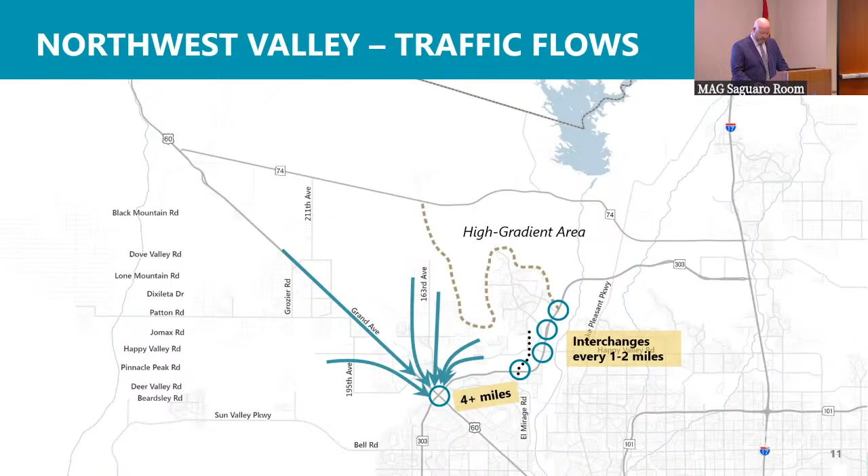As you can see on this map, there are interchanges spaced every 1 to 2 miles along this corridor, but there's a large gap - you see that 4-mile section right there. Residents can travel east and go out of their way about 5 miles, so the majority of folks enter Grand Avenue and go through the Loop 303 interchange.

Let's take a look at some of the travel times in this area, some issues residents are dealing with. The majority of the growth is occurring along 163rd Avenue, you see up there. It takes residents almost 10 minutes to get through that light in the morning, during the AM peak hour. 10 minutes - a long time.

Once they get on Grand Avenue, they have an additional 2.6 minutes to go before they get to Loop 303 - over 12 minutes. I've talked to a lot of residents about their kids who get bused out of that area to different schools. Their kids are late every single day by 20 to 30 minutes because they get stuck in traffic.

This is an illustration I wanted to show the audience. This is westbound Grand Avenue, looking up towards Wickenburg - you can see traffic backed up from 163rd Avenue on Grand Avenue. You can also see traffic backed up on 163rd Avenue trying to get on US 60 Grand Avenue.

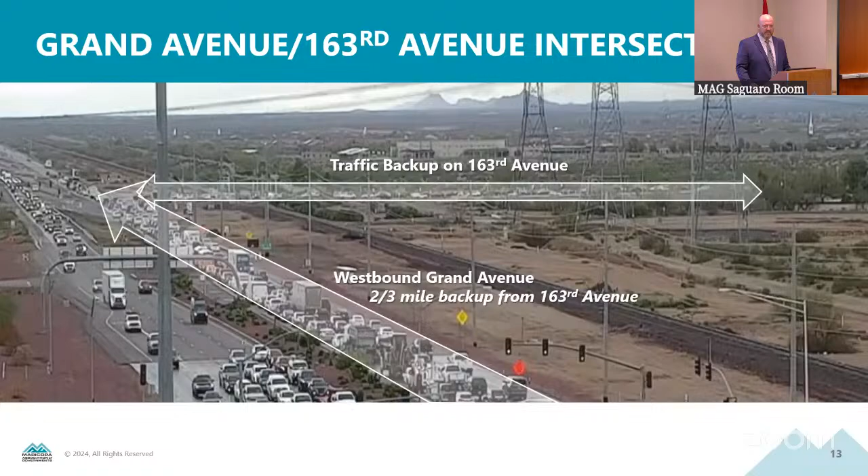Residents trying to make that left onto Grand is a predominant movement. There's about 30,000 vehicles a day that use 163rd Avenue and about 60,000 that use Grand Avenue. This is another viewpoint of Grand Avenue from 163rd Avenue. This photo was taken by a drone, and you can see it was not during the peak hour in the morning, but you can still see traffic backing up.

One of the issues along this corridor is the BNSF rail line, which you can see on the left side of the screen. With all that traffic coming in the AM peak hour, you also have a train running through there a few times a day. Traffic backs up significantly - you can see all those cars backed up in that right turn lane. It spills over into the through traffic, which creates a bottleneck, and it continues to back up all the way to the 303 interchange.

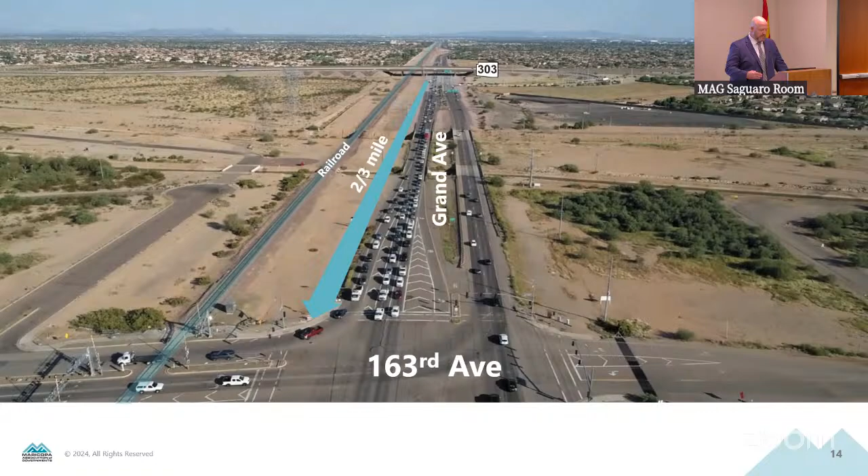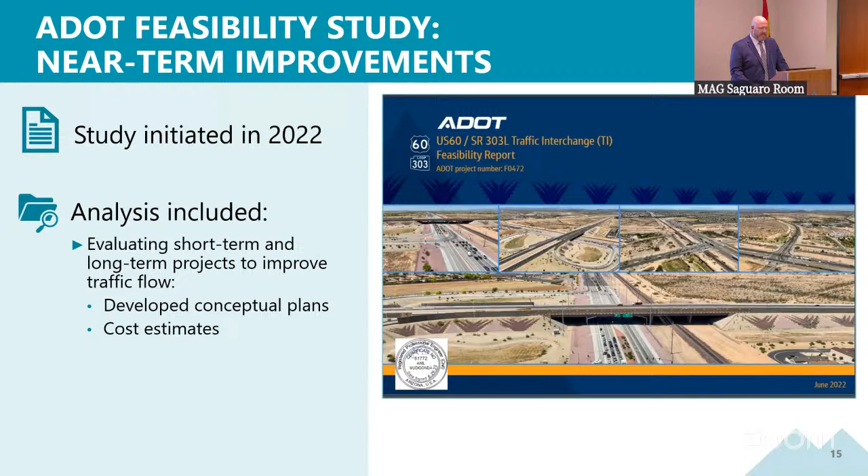This issue is nothing new to the region. ADOT received a state appropriation back in 2022 to do a feasibility study to identify some near-term improvements for this area. They did a great job analyzing some quick improvements to help provide relief to the residents in that area.

The slide on the left shows improvements that have been completed and are currently under construction at 163rd Avenue. The lines highlighted in blue were completed last December. The ones in yellow are currently under construction today. We talked about that heavy left turn movement - well, ADOT's constructing a third. We're going to have triple lefts at 163rd Avenue.

They're also putting an additional through lane in the eastbound direction, and adding more capacity to that right turn lane off of Grand Avenue on 163rd Avenue, to help cut back on traffic spilling into the main through lanes. On the right side of your screen, currently under construction today, ADOT is adding a triple left at the northbound off-ramp on Grand Avenue and an additional right turn lane.

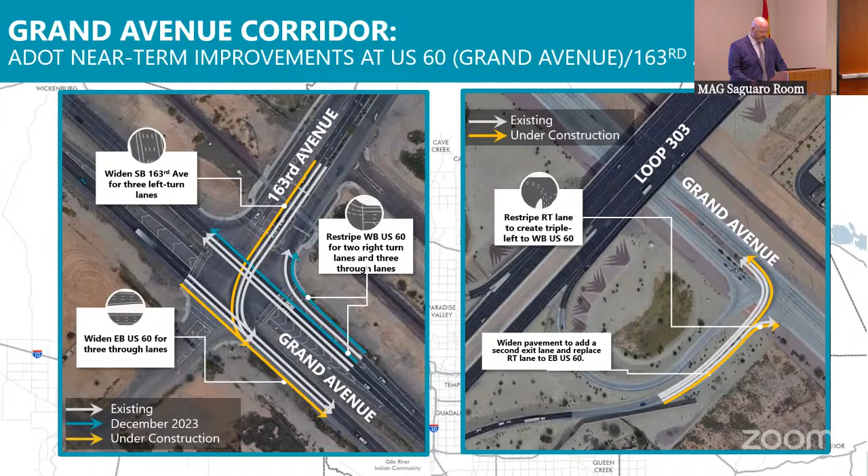So while these studies were going on, we've been talking with the City of Surprise, Peoria, ADOT, McDOT, and a few other stakeholders about the transportation needs in this area. A study was kicked off earlier this year by MAG in cooperation with our member agencies to take a look at Grand Avenue. We knew that more needed to be done besides the near-term improvements being completed by ADOT.

Right now we're doing a corridor study on Grand Avenue from Loop 303 to State Route 74. In addition to looking at different types of improvements on Grand Avenue, we're also looking at the surrounding arterial system, looking at the circulation, where residents come and go, where businesses are going to be located in the future, and how they get access to Loop 303 besides going down Grand Avenue. This study kicked off early this year, and we anticipate wrapping it up late next fall.

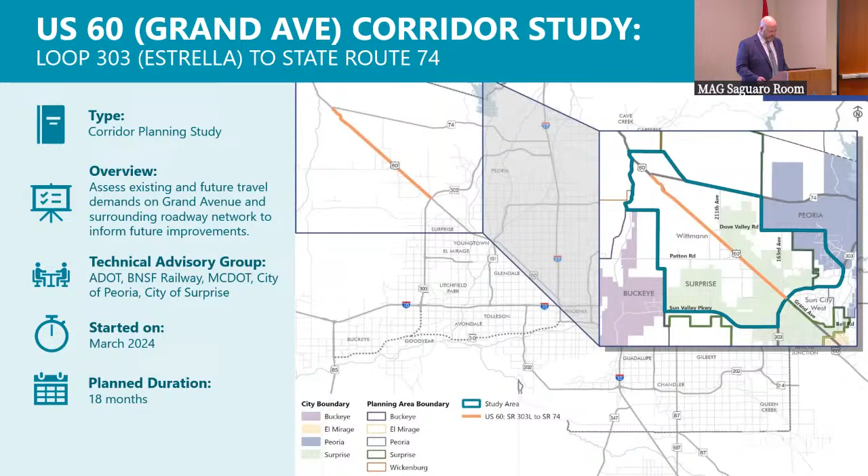As part of that study, we actually held our first kickoff meeting in August of this year. We held this meeting on 163rd Avenue at Asante Prep, where all the traffic impacts are occurring, where the majority of the growth is occurring in this corridor. We wanted to talk to those residents to see what's happening on the ground. So we met with them.

We had about 175 to 200 people in attendance. It was very well attended, and we really wanted to sit down. We wanted to let the residents know, hey, we've heard what's going on in this area. They've been very vocal. We gave them an update on the ADOT improvements in the area, and on what the study looks like and what the process is. But we truly wanted to understand what would they experience on a daily basis. They're stuck in this traffic 15 minutes in the morning to go two-thirds of a mile. They know better than anybody what's happening on the ground.

But we also wanted to understand, what would they propose in this area? What improvements do they see that would help benefit the commuters in this corridor? So we collected a ton of comments. And I want to take a moment to thank staff from City of Surprise, Peoria, McDOT, and ADOT. We had almost 200 people at this meeting, and we had about 22 staff members, including Councilmember Haney, attend to help talk to the residents. We would not be successful if it wasn't for their participation. So thank you for that.

So at the end of that meeting, we pulled our consultant team together. We looked at all the comments we received from the residents. We asked our consultant team to take a look at these, see if they're valid, but also look into the analysis and see what else can we do to help provide relief to these residents. Now I'm going to walk through 5 different recommendations that we're proposing for funding today.

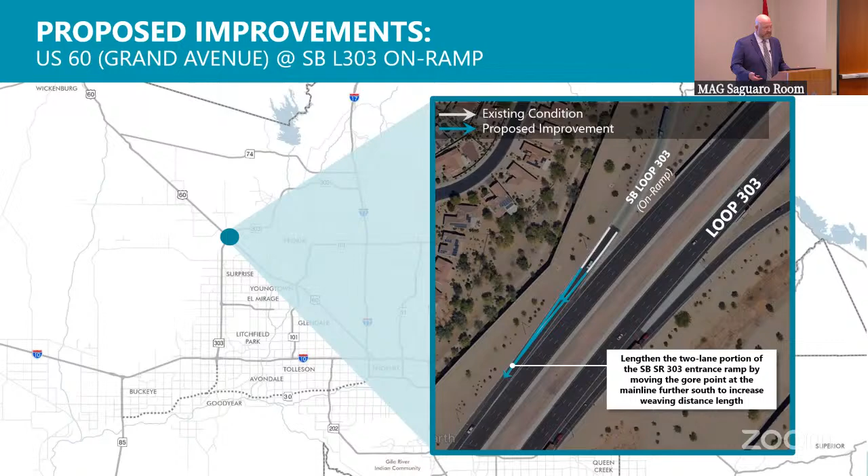In addition to that same on-ramp, we're going to extend the Gore Point. Right now you have that single lane that turns onto the on-ramp. It goes from 3 lanes to 2 lanes to 1 lane really quickly, allowing residents to merge safely on the 303. We're going to extend the 2-lane section about 200 to 300 feet to give the additional vehicles that are now going to be entering that ramp, because of that second right turn lane, more time to merge in and get safely on the 303.

The next one is at an unsignalized intersection west of 163rd Avenue. This T intersection serves a frontage road between Deer Valley and 163rd Avenue. Right now you have cars going 55 miles an hour down Grand Avenue, and you have cars wanting to get off at this location, or they're getting on, which creates a safety issue. A lot of residents commented on safety issues, a lot of accidents occurring in this area, and they were right. So what we're proposing to do is add a decel and acceleration lane at this location so residents can get on and off safely in this section of roadway.

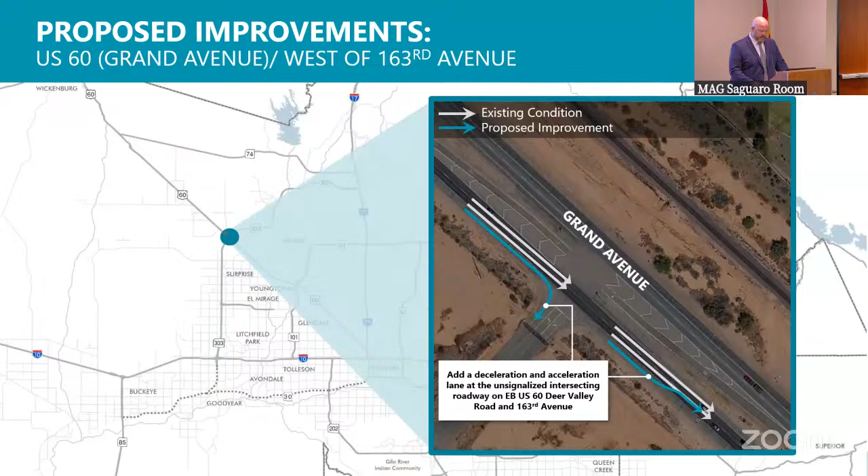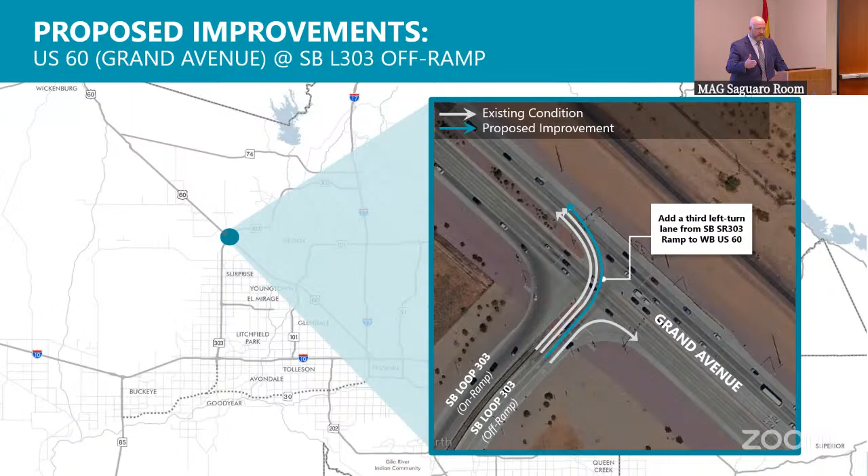The next improvement is adding a 3rd left turn lane on the southbound Loop 303 off-ramp. Right now there's 2 lanes. The great thing about this is we have 3 receiving lanes on the other end. This allows vehicles getting off the freeway to safely line up to get off on 163rd Avenue, so we can start stacking cars up and get them in the right turning movements.

The final improvement we're proposing is adding a 4th through lane, westbound and eastbound, at 163rd Avenue to add more capacity to this intersection and help improve operations. If this project is approved today and goes to regional council approval, we'll work with our engineering team during the design phase to address how these 4 lanes will narrow down to 2 lanes later down the facility.

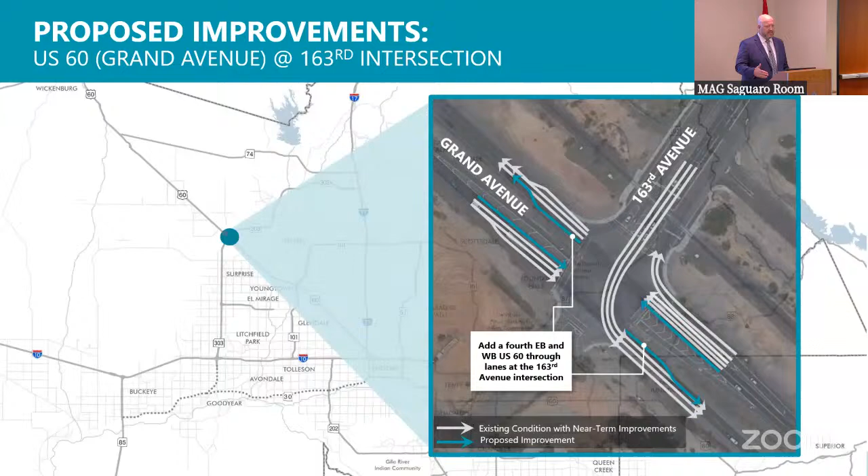Let's go through the AM peak hour delay by approach. The graphic on the left shows the numbers I showed earlier today, where it takes 9.8 minutes for people in the southbound direction to get through that intersection. The middle slide is still the 2023 baseline condition after the ADOT improvements are completed. You can see we go from 9.8 minutes with no improvements down to 2 minutes. That's fantastic, good use of money. Other improvements have also reduced the cycle times.

But on the far right graphic, you'll see 2030 after the ADOT improvements are completed, and the numbers start to increase. Why? Because the area is still growing at a rapid pace. There are a lot of folks still developing off 163rd Avenue, a lot of businesses coming online, and BNSF has a major intermodal facility being planned out towards Wittmann. So this area is still a fast-growing region.

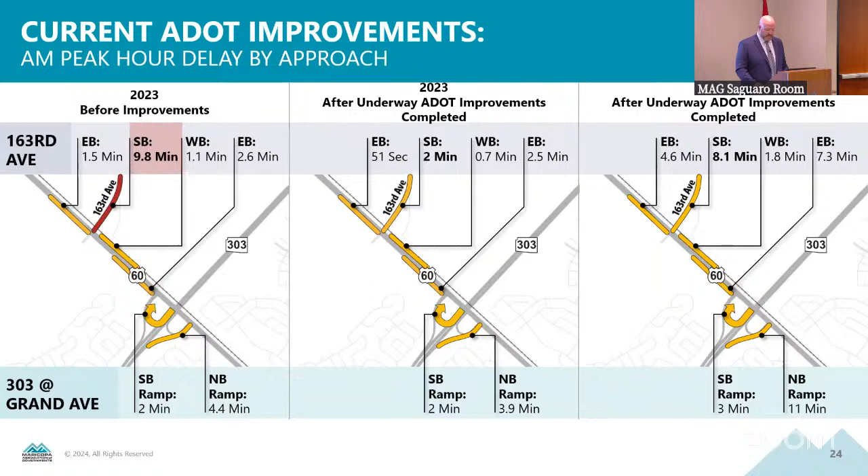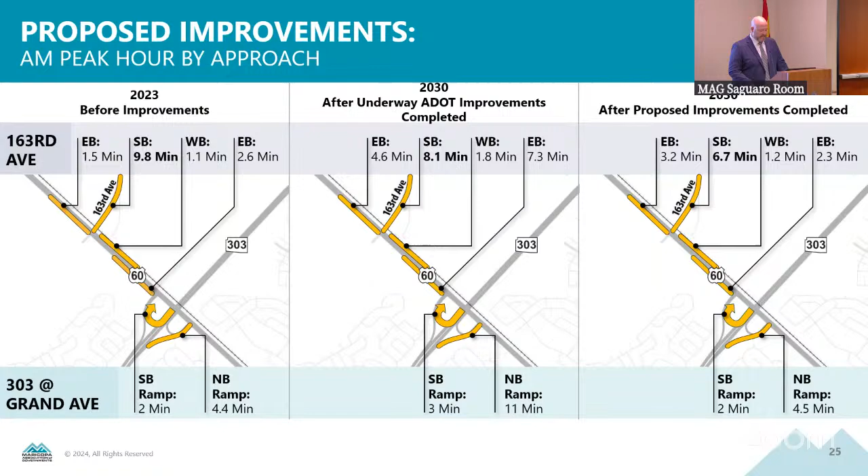In this next slide, the left side is 2023 before improvements, the middle is 2030 after ADOT improvements, and the right is 2030 after our proposed improvements are completed. You can see we start to bring those numbers back down again, especially at the southbound direction at 163rd Avenue. Looking at the eastbound movement, under 2030 ADOT it's 7.3 minutes, and it goes down to 2.3 minutes. Also the northbound ramps go from 11 minutes down to 4.5 minutes. So we're putting a dent in the congestion in this area.

It's great that ADOT is making these improvements, and we're here today to propose 5 projects to help decrease congestion in this area. But it's not the ultimate fix. This is meant to relieve congestion in the short term until we can get Prop 479 projects in place. We have a lot of plans in this area, especially the US 60 Loop 303 Ultimate System Interchange in the future, improvements to US 60 at 163rd Avenue, and looking at a grade separation there. We're also currently studying another access point for residents who want to get on the Loop 303 — that big circle shown there is the Loop 303 traffic interchange between US 60 and El Mirage. So we have a lot of plans in place, and these proposed projects will hopefully help get us to that point.

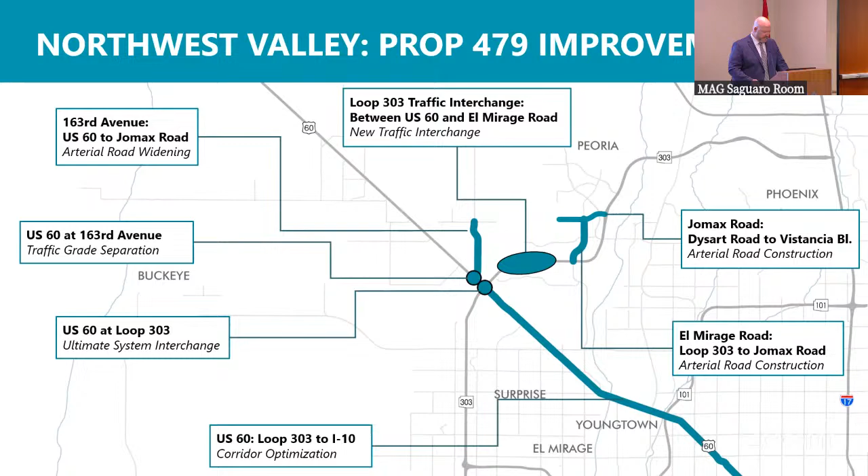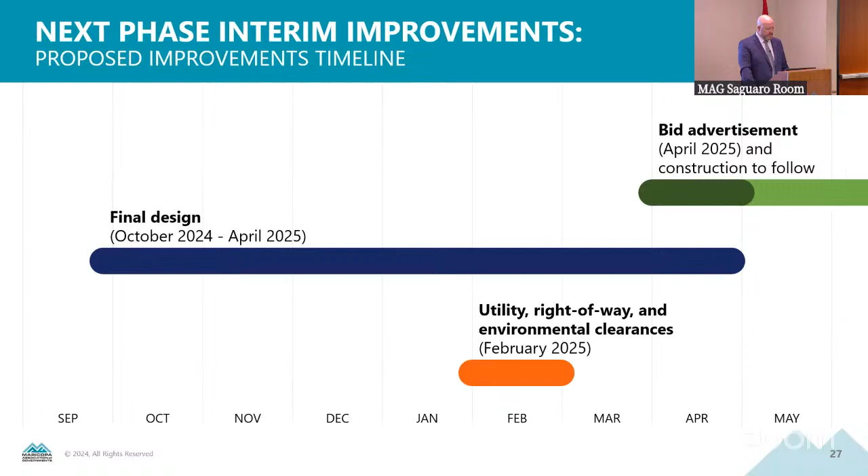If these proposed projects are approved today and by Regional Council, the ADOT design team will be able to get started immediately at the end of October, and they anticipate going to construction next spring, early summer of next year. Madam Chair, that completes my presentation. I'm happy to answer any questions.

Madam Chair, if I could add a couple more points. First, the funding source being requested is the minor improvements allocation as part of the freeway program. There was a robust discussion here at TPC last spring about the value of that funding source and positioning the region to react and respond. One outcome was to increase the annual allocation from 5 million to 10 million, enabling us to be more responsive and put improvements like this forward. Second, there would be no way to move this quickly or be this responsive absent the dedicated half-cent sales tax. Relying just on existing revenue streams, federal funding, and the small portion of state funding available, there would be no way to relieve some of this congestion.

So I just want to emphasize the importance of the half-cent sales tax to be able to address these problems.

Excellent, thank you John. Appreciate that presentation, Tim. I'll open it up for comments and questions. Councilmember Haney, please.

Thank you, Madam Chair. Excellent presentation. I actually represent this area. Growing up in Surprise, this area was almost not even thought of becoming what it is today. It was mostly folks who moved out there to escape the growth, and then very quickly it exploded with growth. A lot of folks felt like they were being forgotten, and the infrastructure continued to be stressed with no relief in sight.

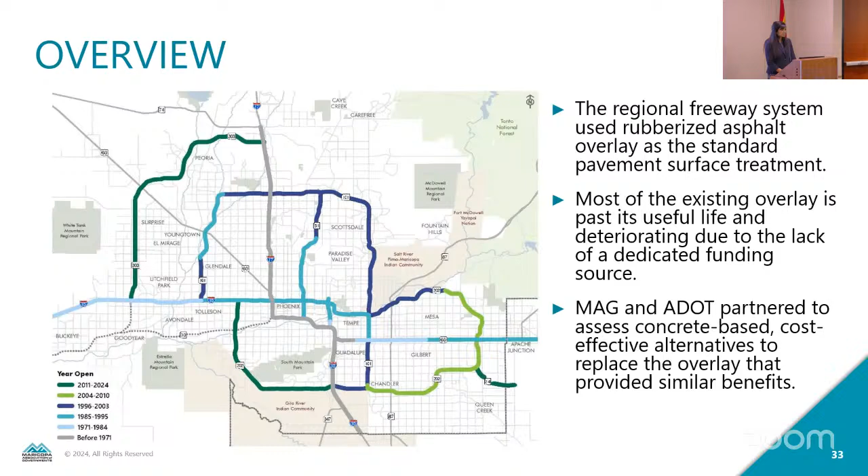This was largely due to the fact that there was no dedicated funding source set aside for its capital replacement, and the only capital replacement that occurred was as a scope element as part of our regional freeway program project improvements. As a result, MAG and ADOT looked into some cost-effective, concrete-based alternatives to that overlay that would provide similar benefits. And so that's where Diamond Grind came into the question.

So what really is the difference with Diamond Grind in comparison to that rubberized asphalt overlay? I'll walk you through the typical design of our regional freeway pavements. First, you have a layer known as the subgrade, which is really that compacted soil. On top of that, you typically have another layer known as the aggregate base, which is graded stone material, or at times can be asphaltic concrete.

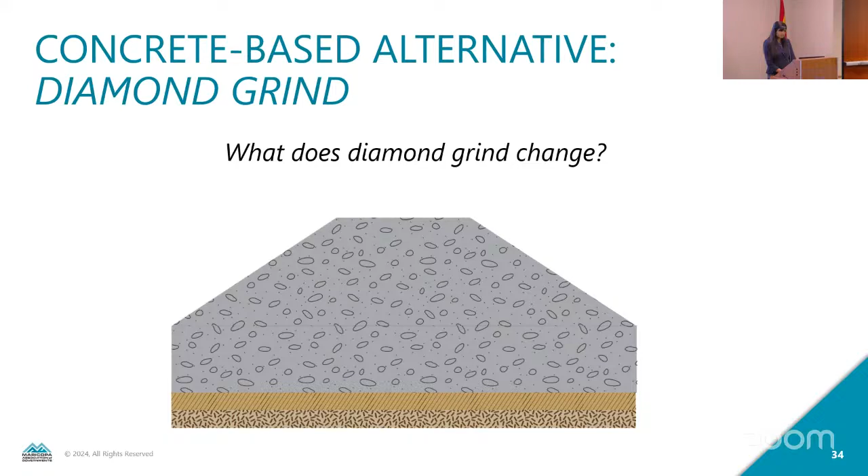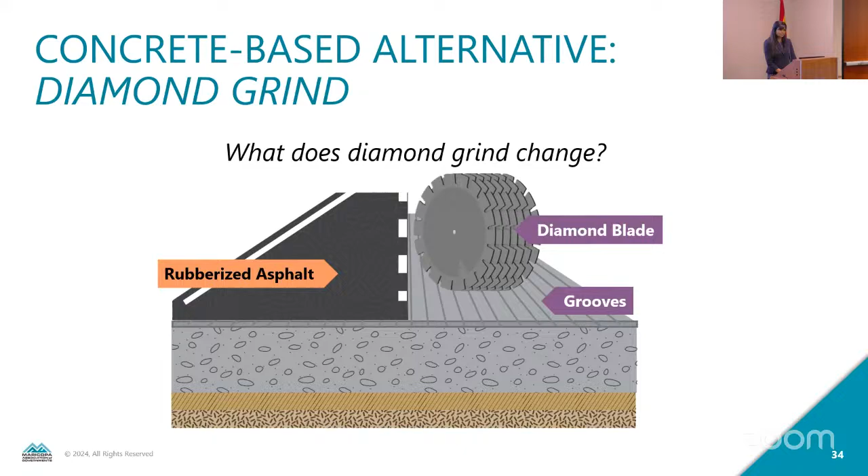Then finally, on top of that, you've got a thick layer of Portland cement concrete pavement, and that rubberized asphalt overlay would be overlaid at the top. Now with Diamond Grind, instead of having that top thin layer of overlay, what you have is diamond blades that directly implement grooves, thin grooves, into that concrete surface.

MAG and ADOT came back and recommended assessing Diamond Grind as an alternative to the MAG Regional Council, and that was approved as a pilot program back in June of 2020. The scope of that pilot included assessing Diamond Grind by implementing it on 3 pilot projects that were part of the Regional Freeway program. The performance of that treatment would be assessed based on 3 approved evaluation criteria shown here on the slide: ride quality, life cycle costs, and public acceptance of that concrete-based alternative.

The 3 pilot projects, in order of implementation, are also shown here on the map. They include the section on Loop 101 Price between Baseline Road and Loop 202 Santan, and the section on Loop 101 Pima between I-17 and Pima Road. Those 2 segments have now been completed. And finally, there is a 3rd pilot project currently under construction on Loop 101 Agua Fria, between 75th Avenue and I-17.

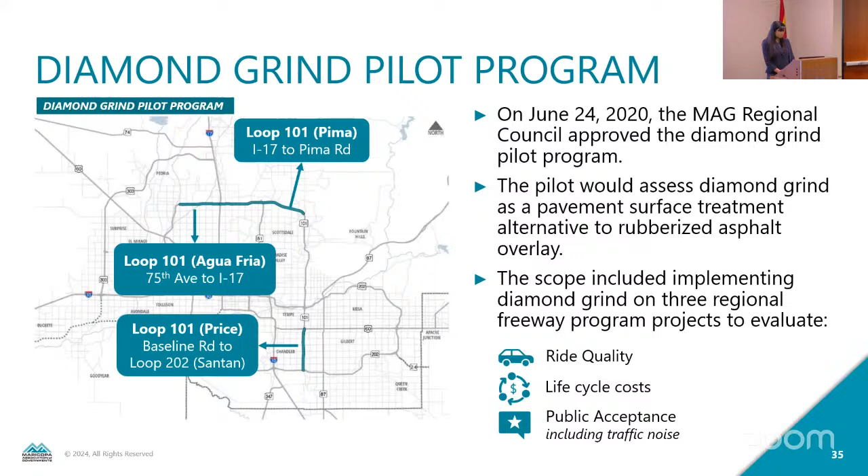So throughout the duration of the pilot program, in addition to those 3 criteria I mentioned, there were several other evaluation efforts completed. Ride quality, as I mentioned, looks into the smoothness of the road and the friction between the tire and that pavement surface, which is important from a safety perspective, particularly during our monsoon seasons.

Then when we looked at life cycle costs, what we looked at was the cost of capital replacements and maintenance practices required for both of those surface treatments over their estimated useful life.

We also tracked and incorporated the public feedback received as these different segments of Diamond Grind came online. Part of that included looking at traffic noise impact—different sound levels, the pitch of those sound levels, and how that noise changed over a set duration resulting from implementing these pavement surface treatments. We also looked into the disruption to the roadway user, meaning lane closures required for the different maintenance practices needed to maintain that road in good quality.

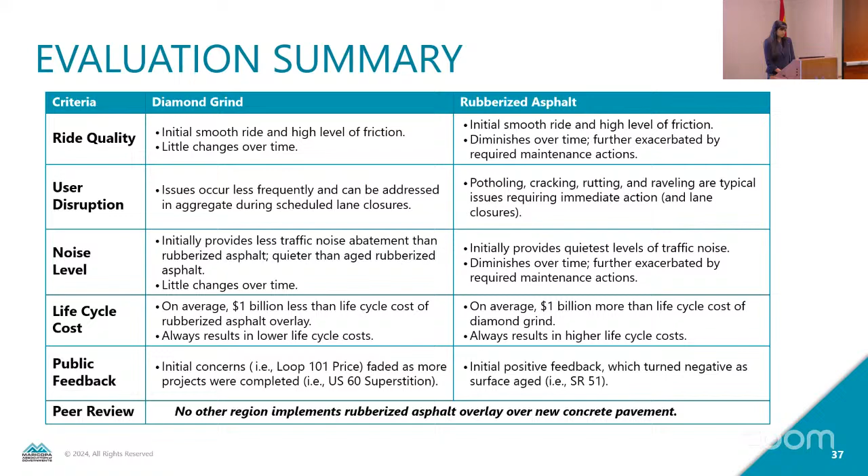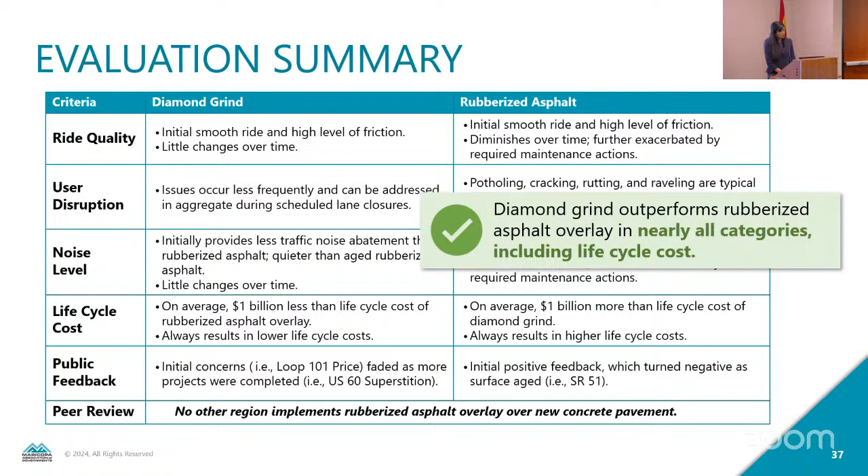When we conducted the peer review, what we found was there is no other region in the nation that does what we do in terms of our regional freeway pavement design. So the bottom line is that Diamond Grind outperforms rubberized asphalt in nearly all categories, including in terms of life cycle cost.

Back in October of 2023, we came back and provided an overview of all these different findings to Transportation Policy Committee. Because of the support received there, we took it forward to Regional Council in November of 2023, requesting to expand the pilot program, and that approval was received. As part of that approval, there were 4 main components.

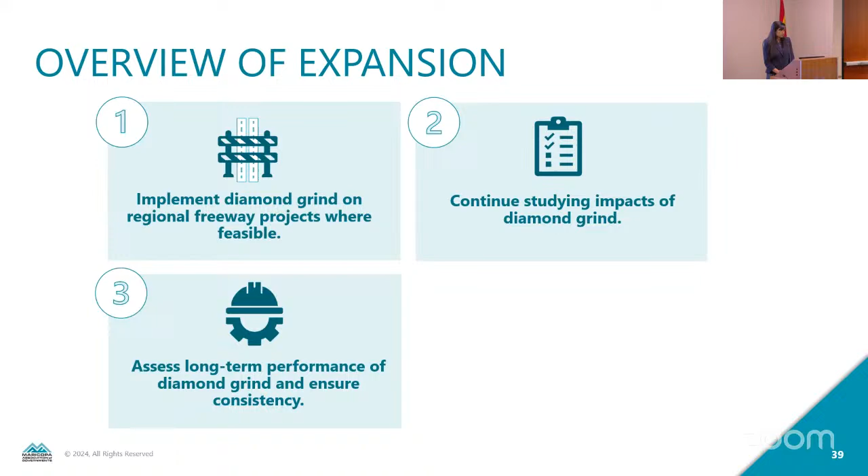The first component was that we would, moving forward, implement Diamond Grind on all regional freeway program projects where feasible. We would also continue studying impacts to Diamond Grind, including a couple of specific study efforts underway. We would also initiate efforts to continue monitoring the long-term performance of Diamond Grind as it aged in our region, and ensure that every application of Diamond Grind throughout the region was performing consistently. Finally, we said we would come back and provide quarterly updates to policy committees.

And so that brings us to where we're at today. This quarterly update is now the 3rd installment of these updates since that expansion was approved, and it covers the period of July to September 2024.

Here are all the different efforts that were underway during that period, including a couple of efforts that are implementing Diamond Grind on different segments of the freeway network. In addition, there are 2 active study efforts underway, and a couple of long-term performance assessments, including a regrind work on that Loop 101 Price corridor. But before I get to that, I'll quickly touch on each of these elements and then end with the Loop 101 Price regrind overview.

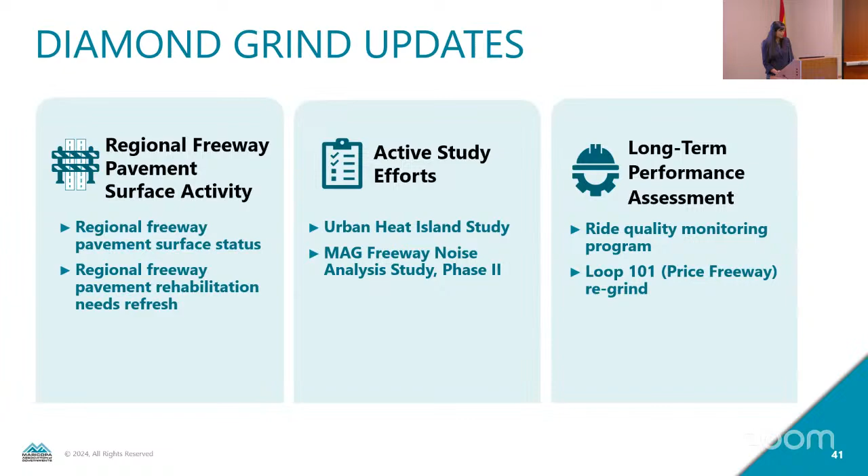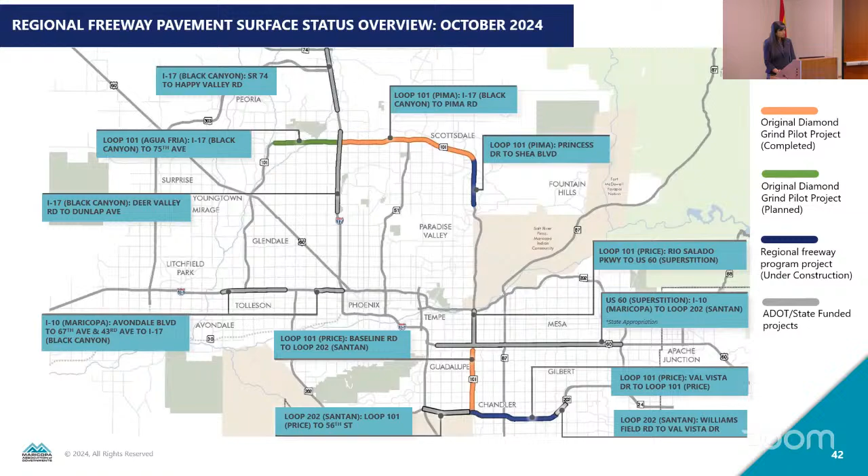So first, on this map, what you're seeing are all the different Diamond Grind projects, whether part of that original pilot program, being constructed as part of a regional freeway program project, or funded either through ADOT or the state legislature. A similar map was provided as part of the last update in August, and largely these projects remain the same. One new addition is an ADOT-funded maintenance project on Loop 202 Santan between Val Vista and Williams Field Road.

Another effort currently underway is looking to update the freeway pavement conditions as of the current time frame. Previously, there was no dedicated funding source available for capital replacement of pavement surfaces. As discussed earlier regarding the importance of passage of Proposition 479, the Regional Strategic Transportation Infrastructure Investment Plan, partially funded through Prop 479, includes an allocation set aside to directly address these needs.

As part of this refresh, we're looking to update the latest conditions so that can help inform how this set-aside funding should be allocated based on where the priority needs are. Previously, MAG and ADOT had completed this effort to show conditions in 2020, and it just needs updates to reflect some of that ongoing or completed work shown on the map before.

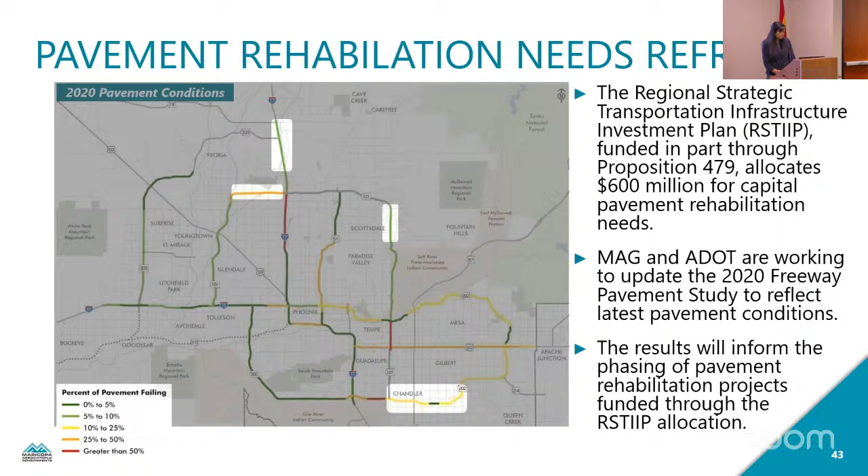As a further example, the segment currently under construction on Loop 202 Santan, between Val Vista and 101, before construction was categorized in poor condition. After construction, it will no longer be in poor condition, so that will be one of the updates made here.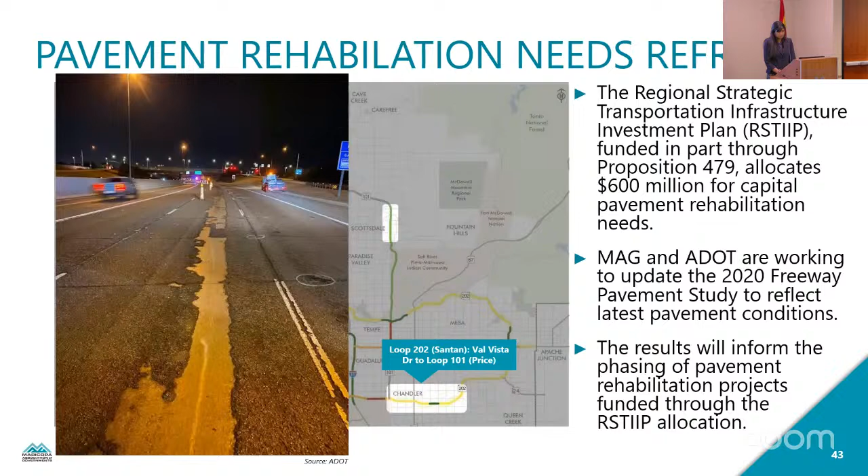Moving on now to our two active study efforts. The first one currently underway is a study looking at the impact of diamond grind on the regional urban heat island effect, especially in comparison to the impacts of rubberized asphalt overlay. This is being conducted in partnership with ADOT and led by a team at Arizona State University. As of September, the project team had just completed their 3-month continuous data collection, and efforts are currently underway to complete the analysis of that data.

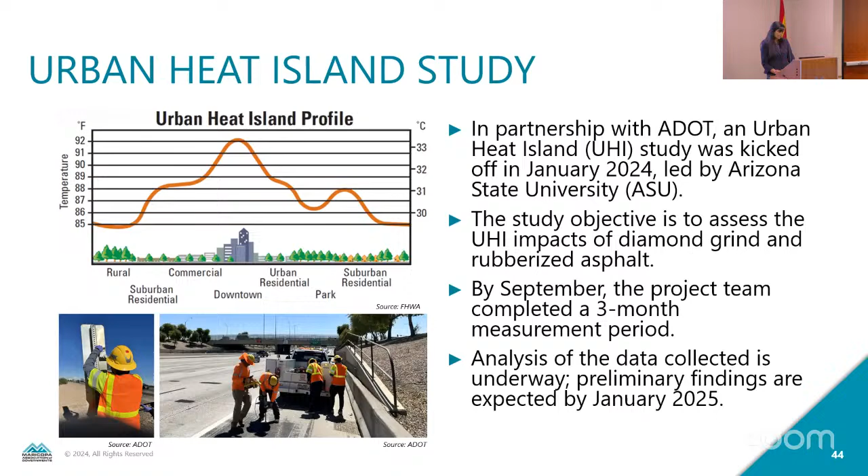The second active study effort is the Freeway Noise Analysis Study Phase 2. As shown prior, there is one last original pilot project yet to be completed. This project allowed a unique opportunity to collect noise data before and after the construction of diamond grind. The first phase was actually completed during the program's pilot phase back in 2021, focusing on the other two completed diamond grind pilot projects.

With this effort, we're focusing on the third pilot, Loop 101 Agua Fria. Not only are we collecting data before and after construction, we're also collecting data under different temporal conditions, which is known to impact traffic noise. There's a total of 4 planned measurement phases. As of September, 2 had been completed, accounting for pre-construction data under both winter and summer conditions.

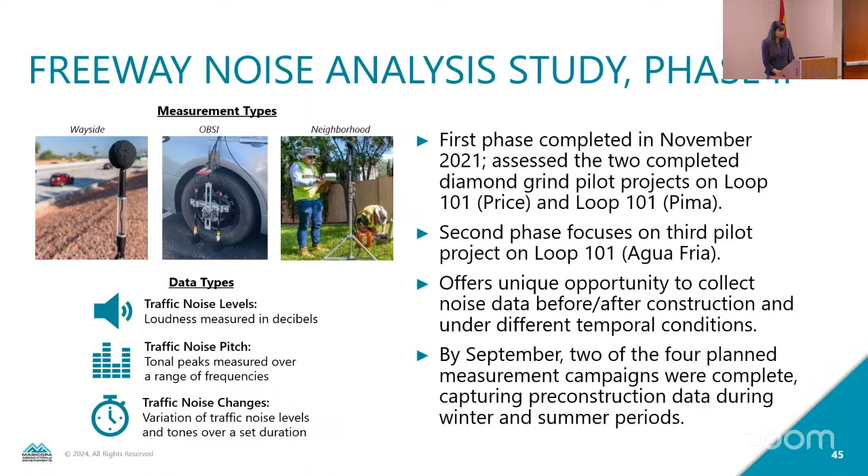Finally, a new effort being initiated by ADOT is an ongoing monitoring effort looking at ride quality on an annual basis. ADOT will go out annually collecting ride quality data using this vehicle shown on the slide, on all diamond ground surfaces completed to date. That data will go through a year-over-year analysis to reflect how diamond grind performs as it ages.

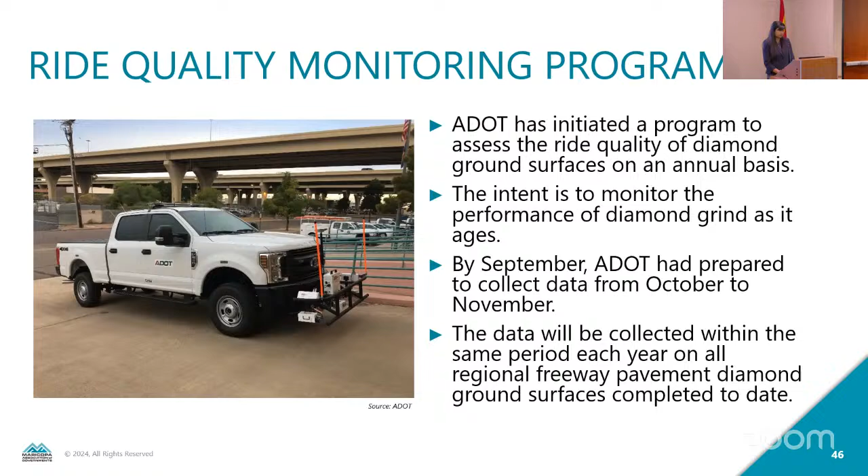As of September, they had completed all preparations to go out there between October and November, and they'll do this every year during this same time frame. I believe they're actually out there right now in the midst of this work.

This brings me to my final update for this quarter, the work just completed on the Loop 101 Price corridor. As part of assessing the performance of diamond grind, we also wanted to ensure it was performing consistently in every instance it was applied throughout the region.

One question still outstanding from our original discussion with TPC back in October 2023 was why Loop 101 Price was getting different feedback than any of the other diamond ground sections had received to date. To back up a bit, the section on Loop 101 Price between Baseline Road and Loop 202 was the very first pilot, completed in fall of 2020. Once completed, it received a significant amount of public feedback regarding traffic noise concerns, and to date it's been the only one to receive that level of feedback.

MAG and ADOT went back and looked into what might be causing this issue specific to this corridor. The only visible evidence we could point to was something known as transverse tines, which are horizontal grooves known to cause tire whining, essentially emitting a high-pitched noise. So as part of the approval to expand the pilot program and ensure consistent application, MAG and ADOT agreed to remedy this.

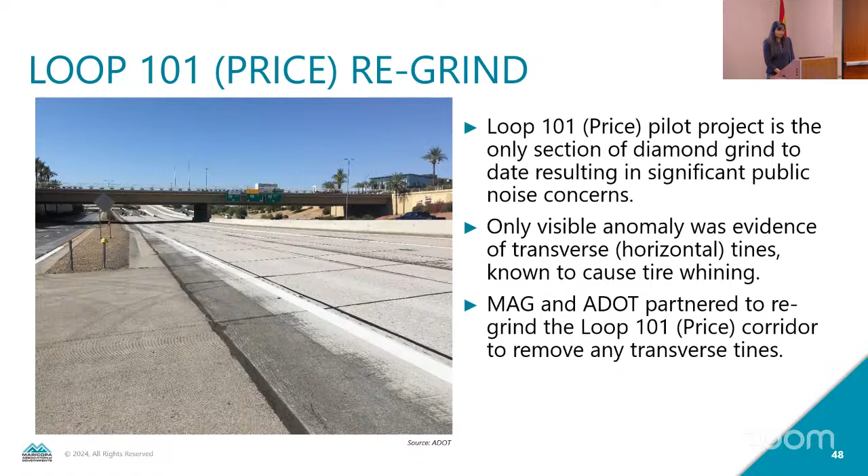Funding for that work was approved by the MAG Regional Council in February 2024. ADOT then completed the work over a 5-month period between April and August 2024. What you see here is that corridor going from a location that still has the overlay to the Diamond Grind section post the regrind work. Since that work was completed in August 2024, ADOT has not received any public feedback regarding traffic noise concerns.

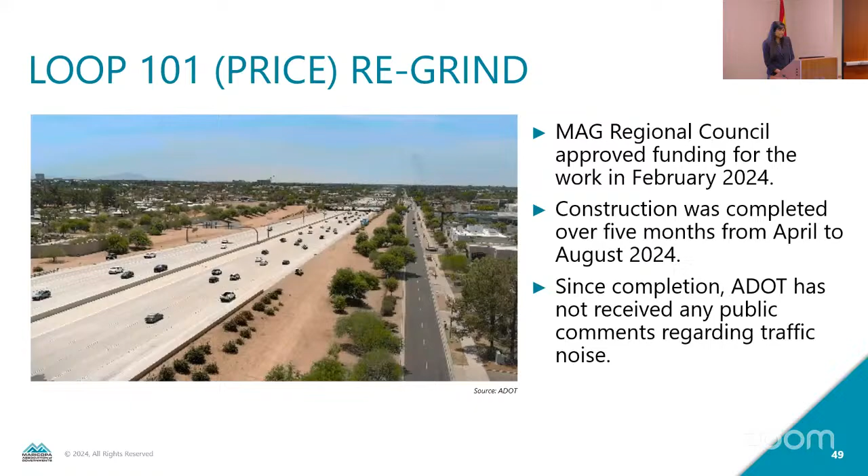I'll walk you through these results, but first some context. On the y-axis of this graph are sound levels measured in decibels, and on the x-axis is frequency, measured in hertz, representing the pitch range of the emitted sound levels. As a rule of thumb, under 1,000 hertz is considered the low pitch range, and sound levels emitted above 1,000 hertz are within the high pitch range.

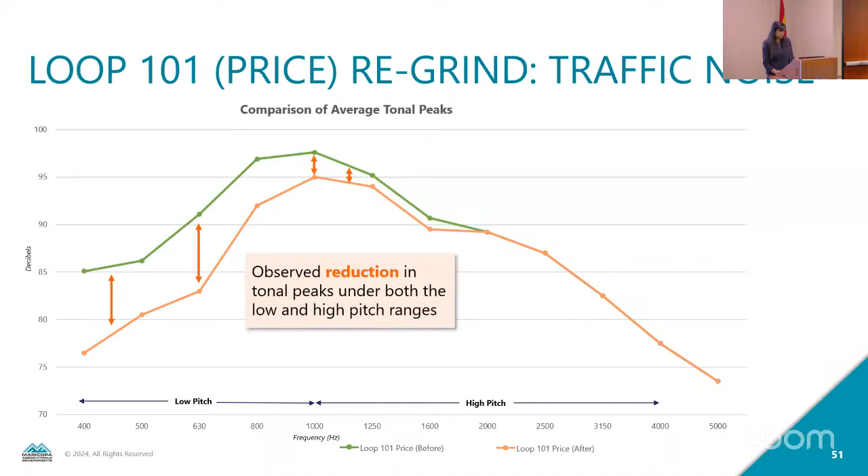This green line shows that section of the corridor before the regrind work was completed, and this orange line shows it in August after the regrind was done. What you're seeing is a reduction in sound level peaks in both pitch ranges, the low pitch and the high pitch.

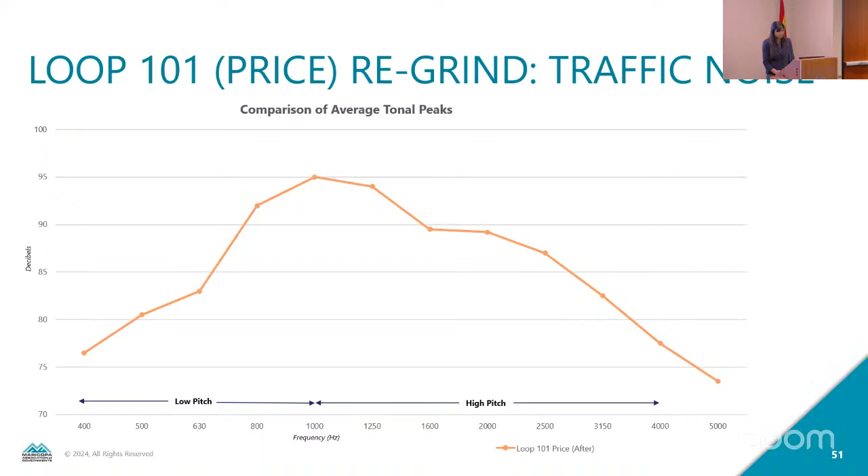To put that in further context, we did this same analysis as part of the first freeway noise analysis study back in 2021, which looked into both Diamond Grind surfaces and a variety of rubberized asphalt overlay surfaces. We found there was a section of Diamond Grind that was the best performing, actually outperforming rubberized asphalt in good condition in the low frequency range. That's what the blue line here represents.

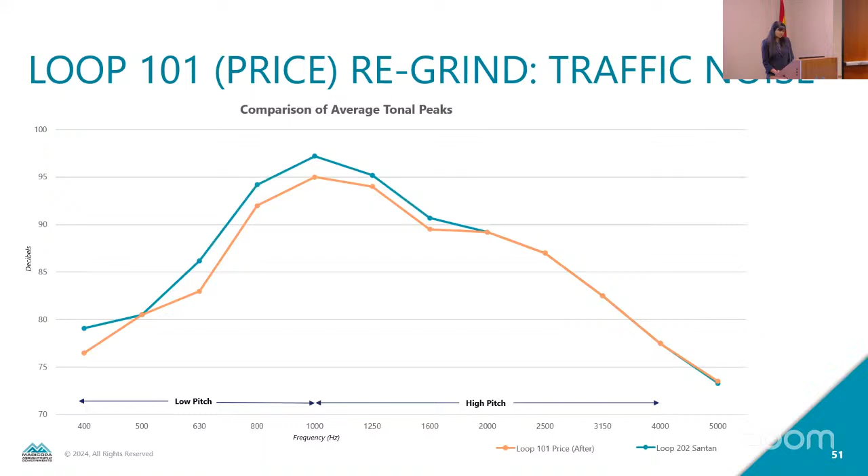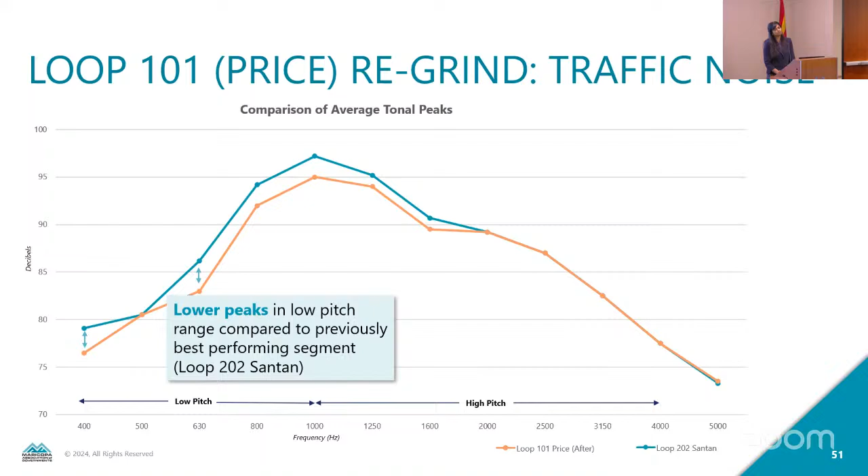The section of Price after the regrind was completed is actually performing even better than the original best performing section in that low frequency range. Overall, on average, traffic noise levels reduced by about 3.5 decibels. Three to five decibels is considered noticeable by the human ear.

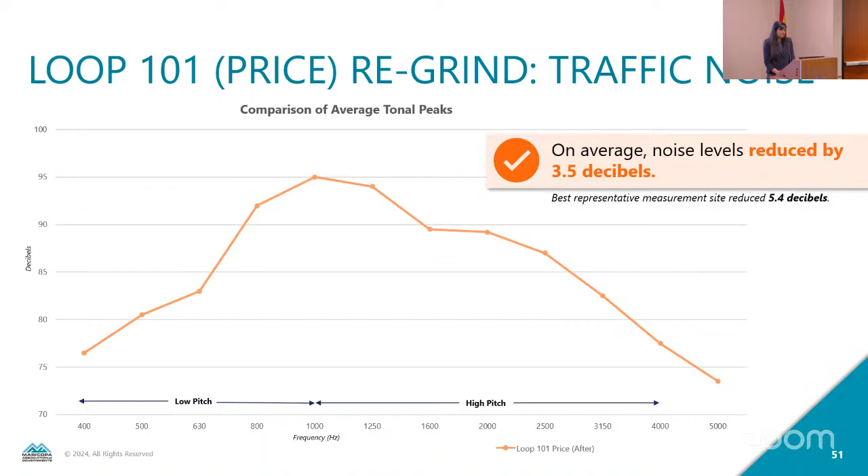One of those measurement locations was identified as the best representation for collecting impacts from freeway noise, since it was a bit more shielded than other locations from surrounding arterial traffic noise as well as frontage road noise. That location actually showed a reduction of 5.4 decibels.

To summarize, this section of Loop 101 Price from Baseline Road to 202 was the very first pilot project to come online. It was the only section of Diamond Grind to date that resulted in this kind of feedback. As a result, MAG and ADOT went back to remedy that and remove any evidence of the transverse tines theorized to be causing that result. Based on the assessment conducted, there was a resulting improvement.

That essentially completes one of the major components of the Diamond Grind pilot program expansion. This corridor will continue to be included as part of the ongoing monitoring program I mentioned earlier, but otherwise this effort has been completed.

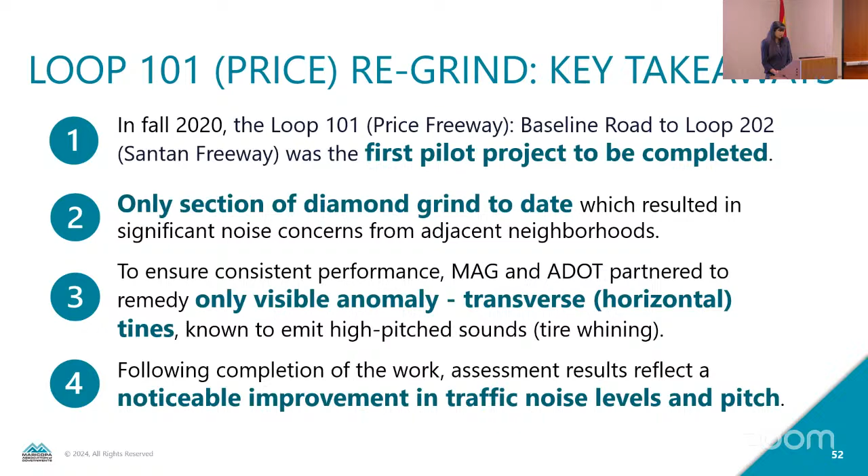In terms of next steps, you can expect an update on activities currently ongoing in this period, between October and December 2024. That'll touch on some of the things I mentioned earlier, including data collection efforts on the monitoring program, and any study analyses available from the Urban Heat Island or Freeway Noise Analysis Study Phase 2, with that update expected in January 2025.

That completes my presentation today, but I'm happy to take any questions.

Excellent, thank you. You really had me at $1 billion less, Arminta - that's where you had me. But really, it does check all the boxes, and I appreciate these quarterly updates. Great results on the price regrind. That's fantastic. Again, highlighting Prop 479, recognizing that $600 million for capital pavement rehab needs are funded in part with Prop 479. So again, a great recognition of what those funds contribute to.

I have a comment from Supervisor Sellers: it appears that the surface course in the Broadway Curve project is asphalt - can you comment on that? That's correct, Madam Chair, members of Transportation Policy Committee. The Broadway Curve project was under construction before the pilot program expansion was approved. At that time, the only Diamond Grind being implemented as part of the Regional Freeway Program were those three initial pilot projects. Anything that had occurred before that, or was under construction prior to that, still had rubberized asphalt overlay as a scope element.

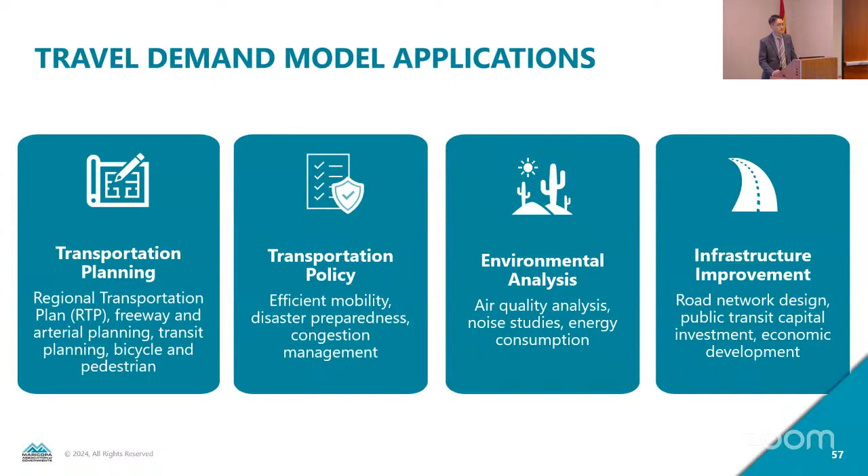Our model covers an area a little bit over 16,000 square miles. For modeling purposes, it covers the entire Maricopa and Pinal counties and portions of Yavapai and Gila counties. Just to put things into perspective, this area represents about 30% larger than the entire state of Maryland. Yeah, it's hard to believe, but it is.

So in our 2023 horizon year model, we include about 5.5 million population, and in the 2050 model, we have about 7.7 million.

The MAG travel demand model has many sub-models and procedures. The main part is called the activity-based model, ABM in short. It predicts the personal travel within this region, like driving to work, sending your kids to school, going out for lunch - all those travels related to those trips. The MAG ABM has been recognized nationally and internationally as one of the most advanced travel modeling tools.

The tour-based truck model is also another very important element of the MAG model. As its name suggests, it simulates truck trips based upon tours, where trucks depart from their depot in the morning and travel to different destinations throughout the day, throughout the region, and eventually return to the depot. Think of maybe Amazon's trucks as a good example.

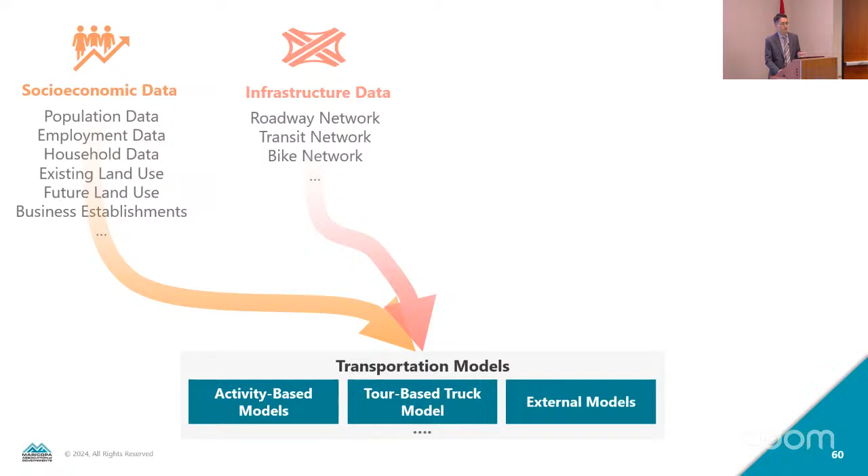MAG also maintains multimodal modeling networks to reflect the transportation investments. The development of those networks will not be possible without input and staff collaboration from all of your agencies.

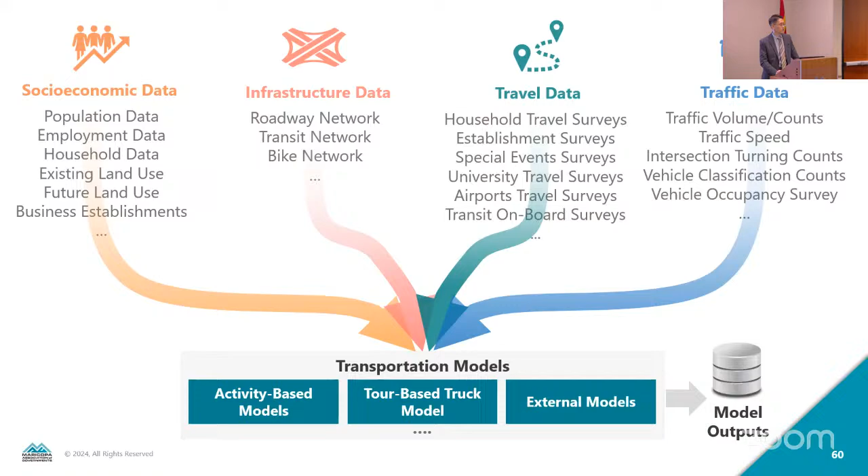And then to build and update the model, we also need a lot of household survey data to inform us of the latest travel behavior. And also we need a tremendous amount of traffic data to validate the model and make sure it does the right thing.

Our model produces a lot of very useful information, such as travel demand, which relates to the trips people make, like origin and destination information. But the network impact is actually the most sought after information from the member agencies. That includes the volume and speed, any of the congestion information. So we provide support to all of you for your development mostly through these products.

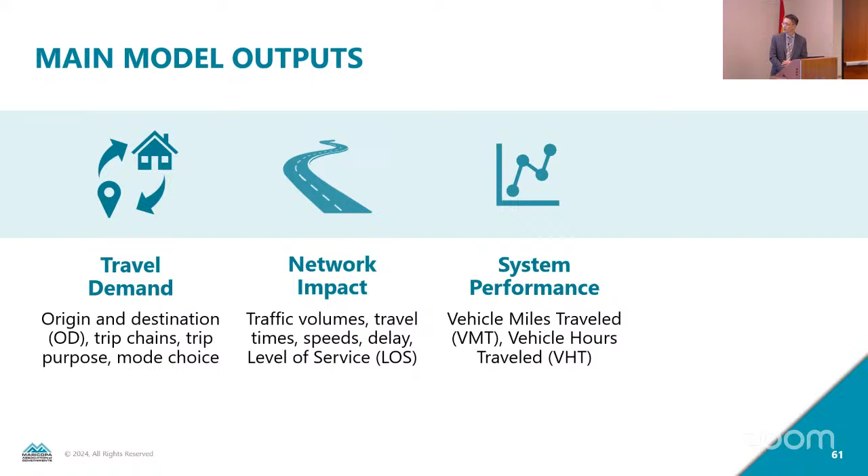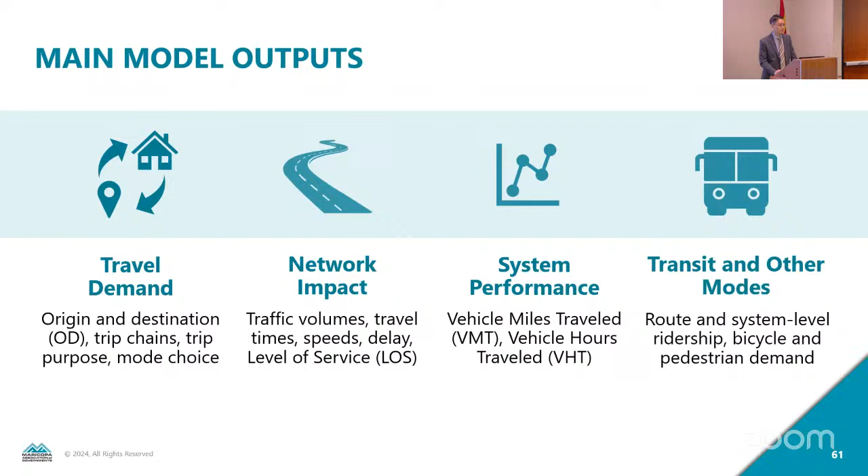And the vehicle miles traveled, VMT and VHT, those are among the top indicators for system level performance. We also provide forecasts for other modes like public transit or bike and ped, all those things.

Just to put this in perspective, for those of you who are elected officials sitting in your meetings where there are zoning cases about a project or development, and there's arguments back and forth about it creating this much traffic -- no it isn't, yes it is -- the baseline source of truth that they're arguing from is this model. So that is creating the baseline of discussion for whether it will or won't impact traffic as you're trying to decide with your residents.

How much does this apartment complex, this large subdivision, impact the traffic around us? So this is fundamental to what you're going to hear in your weekly, monthly council meetings, which I know are very fun. They have those discussions, don't they?

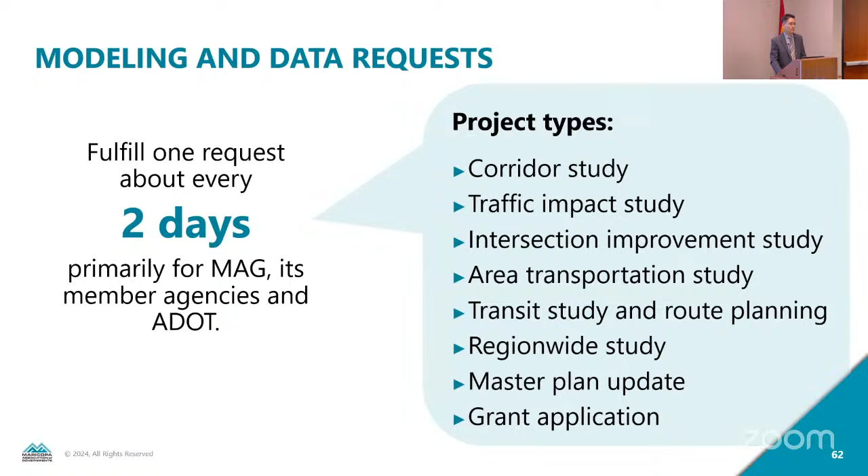Always -- thank you, Ed. On that note, we do receive a lot of requests from the member agencies, and our modeling teams have been working on those. About 150 modeling and data requests per year that we receive, so about every 2 days we complete a request, primarily for MAG, member agencies, and ADOT. We provide data and insights on a variety of projects with development -- from as small as an intersection improvement study to a complex master plan update.

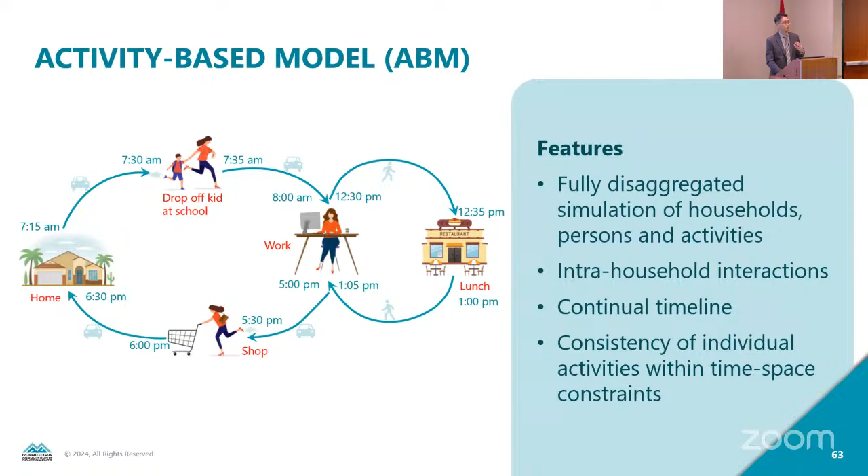So I did want to spend a little more time to talk about the activity-based model. It is used to simulate people's travel behavior in detail. As in this simple example, we simulate this person's entire daily itinerary, from the morning when she carpooled with her kid and dropped the kid off at school, then drove along to the office to work.

Then during lunchtime, she walked out, took a short walk and grabbed a bite. And near the end of the day, she drove back home with a stop at a grocery store. These are, for both you and me, the travel decisions we have to make every day that have impacts on our transportation system.

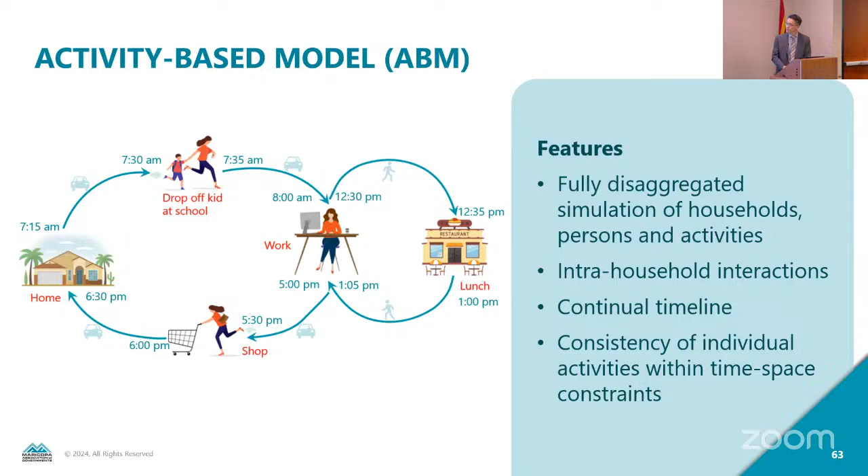So under the guidance of FHWA and FTA, our model goes through extensive peer review processes. The latest one was conducted in December 2018, where the peer review panel -- a group of national leading experts from academia, peer agencies, consultants, as well as federal officials -- spent 2 days here at MAG scrutinizing the MAG ABM. They went over everything from the assumptions, methodologies, implementations, documentation, as well as the model results.

After that, we spent a lot of effort to address the peer review panel's comments, conduct additional analyses, and enhance the model with new features. In 2020, the peer review panel unanimously recommended the ABM as the model of record for MAG. So since 2021, about 3 years ago, the model has been part of the official MAG model that took on many important tasks.

One of the most notable comments or compliments from the peer review panel was about the quality of the model results. So our model does go through a rigorous validation process to ensure its accuracy. The 2018 base year model has been validated against multiple sources of data, such as actual traffic counts, commercially available speed data, and origin destination data.

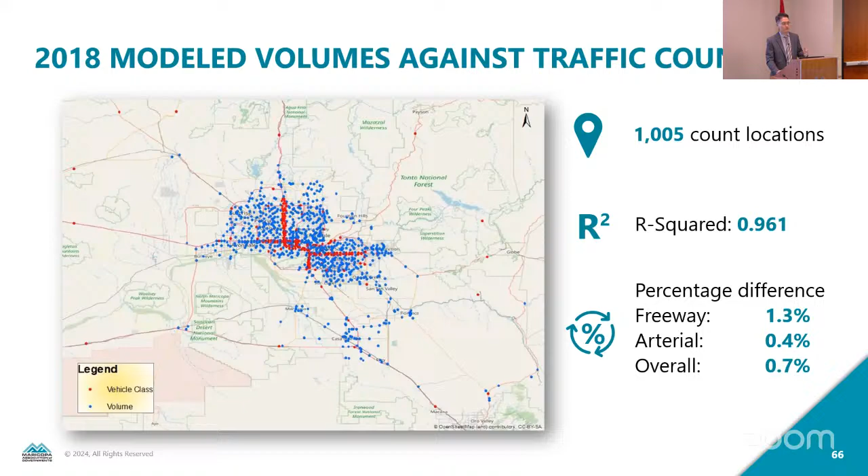Thank you for saving me 30 minutes, Ed. But we spend countless hours just to make sure the model does the right thing. Every time there's a model update, we go through extensive effort to make sure we meet the expectation of the users.

Our modeling team has been actively updating and enhancing the model. One of our goals for next year is to make 2024 the new base year. As you heard, 2018 was the base year, and after COVID, it's a long overdue effort to make 2024 the new base year. Apparently, we're going to need some observed data.

We have received the 2023 onboard survey results from Valley Metro, which you've probably heard about through different channels. But we do need a few more. We have a household travel survey going on, which we'll complete in about 2 to 3 weeks because we're reaching our target. We also have the ASU student survey going on.

At the same time, we are laying some groundwork for the ABM recalibration by conducting preliminary analysis on the survey records we've received so far. We also have a plan to do a complete recalibration of our truck model, which includes heavy, medium, and light trucks.

The second half of the 2024 traffic counts will be on the way soon. After that, we'll be getting some new traffic counts, and with those, we'll be able to do a comprehensive validation of the model.